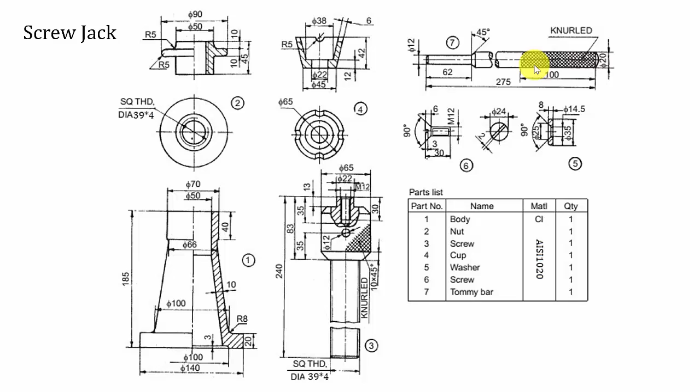In screw jack we have 7 parts, namely the body, the nut, the screw, the cup, the washer, the second screw and the tommy bar. First I am going to draw the parts individually, then I am going to assemble it. First we will start with the body.

Open Solidworks, click New and create a new part. First I am going to draw this section and I am going to revolve it so that I will get the whole body assembly.

Select the front plane, click Sketch, and draw the outline of the body.

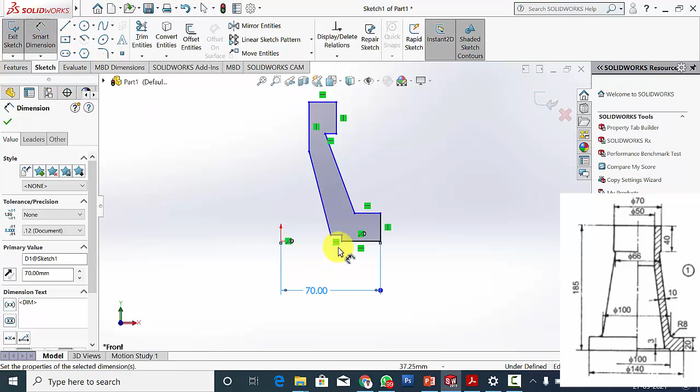Select Smart Dimension and mark all the dimensions. The outer diameter is 140 divided by 2. The inner diameter is 100 mm, so the radius is 50.

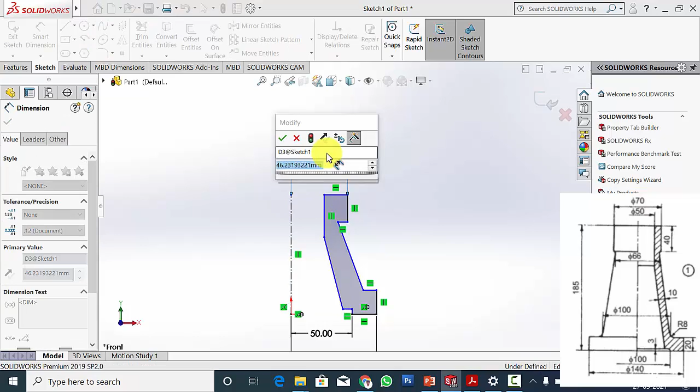On the top side, to draw the dimensions, I am going to draw a center line. The topmost diameter is 70 mm, so the radius is 35 mm. The inner radius is 25 mm, and the neck radius is 66 by 2, that is 33 mm.

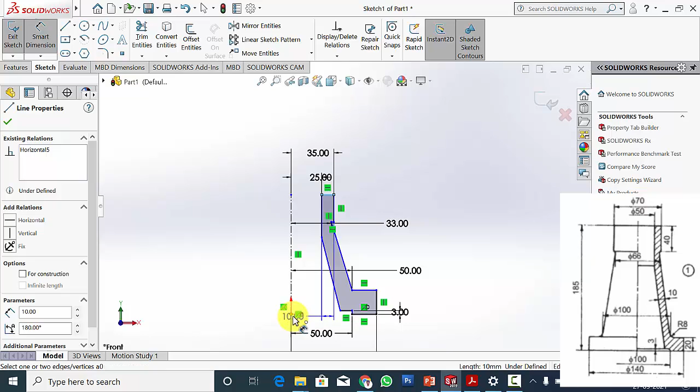This radius is 50 mm since the diameter is 100. The distance between these two lines is 3 mm. The overall height is 185 mm, and the height of this section is 40 mm. Then the height of the bottom section is 20 mm.

Now these two lines are parallel. So to make this parallel, click Control, select these two lines and select parallel. Then click OK.

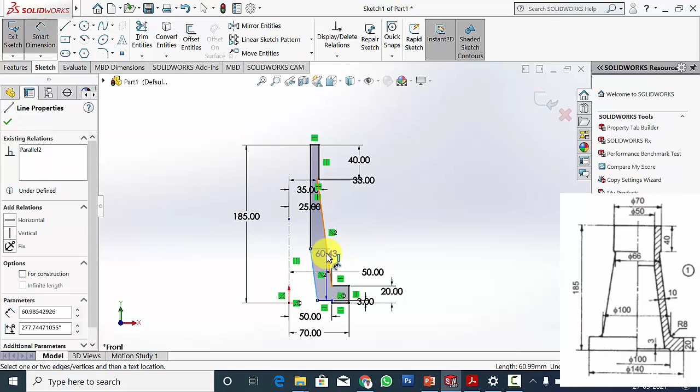Now the gap between these two parallel lines is 10 mm. Select the top point of the center line and any point of the top edge and make it horizontal, so the drawing is fully defined. There will be no minus symbol near the sketch.

Now go to Features, click Revolve Boss, click OK.

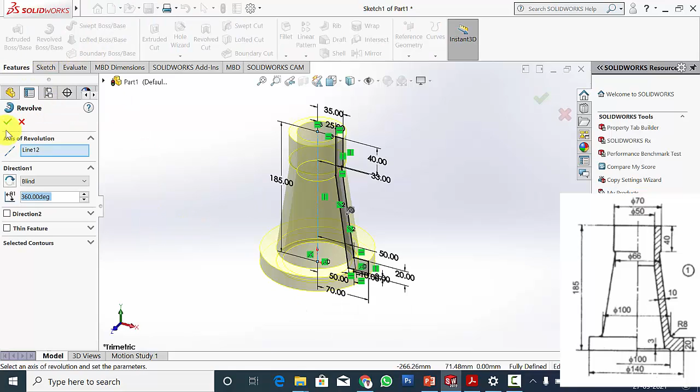Now to create the chamfer in this region, and to create the fillet in this region, go to Fillet, the radius is 8, select the section, then click OK.

Now the body is made of cast iron, so right click on the material, click Edit Material, go to Iron and click Gray Cast Iron, click Apply and Close.

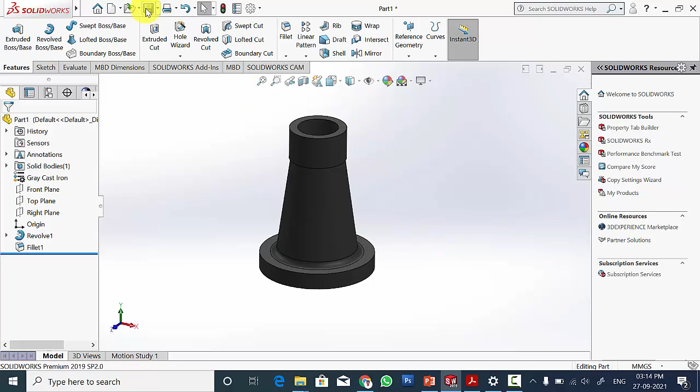Now save this part in a new folder. The name of the part is Body.

Close this. Next I am going to draw the nut. In the nut I am going to draw this section and I am going to revolve this.

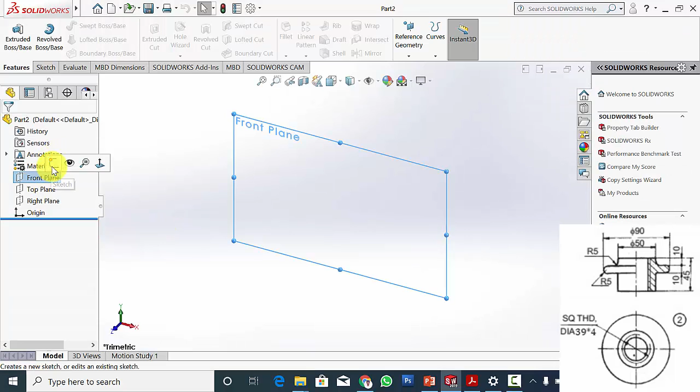Create a new part. Select the front plane, select Sketch, and draw the cut section of the nut.

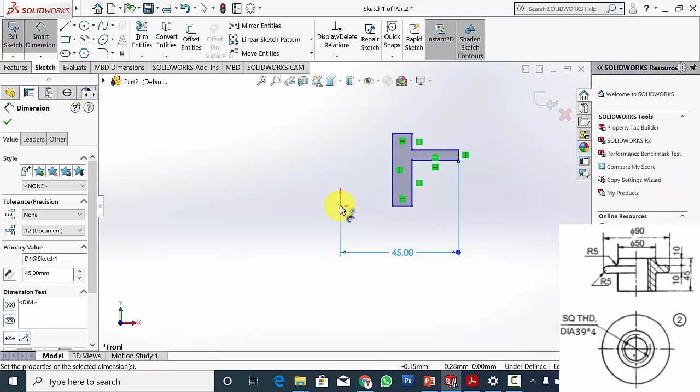Go to smart dimension and mark all the dimensions. The outermost diameter is 90 mm, so the radius is 45, and this radius is 25. The thickness of this section is 10 mm. The overall height is 45 mm, and this gap is 10 mm.

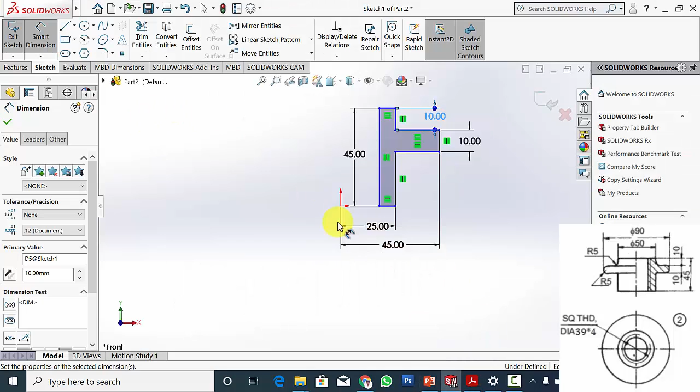Then the inner radius, the inner diameter is 39, so the inner radius is 39 divided by 2.

Now click this point, select any one of the points in the bottom line and make it horizontal. Further, these two lines are collinear, so click Ctrl and select these two lines and make it collinear. Now the drawing is fully defined.

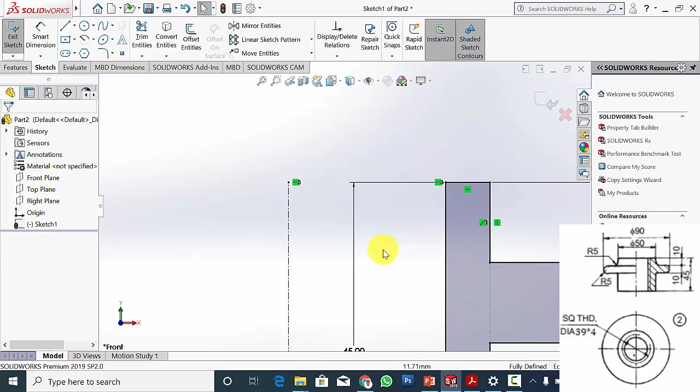So to revolve this, I am going to create a center line, and you can see a blue color dot here. To make this black, click Ctrl, select the point and any one of the points in the top edge and make it horizontal. Now the sketch is fully defined.

Go to Features, Revolve Boss, click OK. Now to create the fillet in this region, select Fillet. The fillet radius is given as 5 mm, as you can see in the image. So select the regions 1, 2 and 3. Now click OK.

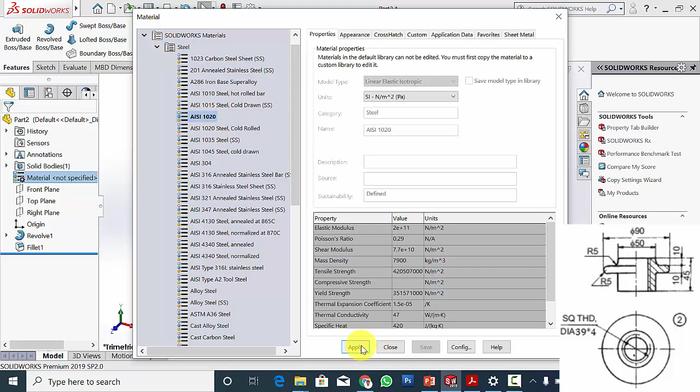This part is made of AISI 1020. Right click on the material, select Edit Material, go to Steel and select AISI 1020, click Apply and Close. Now save this part. The name is nut.

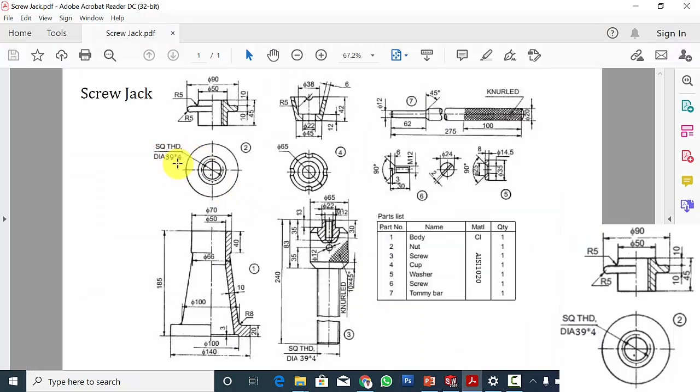Here we have to create an internal thread as specified in the drawing. It's a square thread of diameter 39 into 4, with pitch 4 mm.

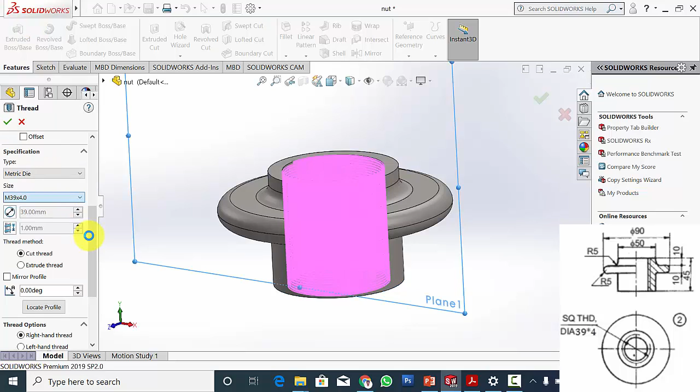Go to Thread, select the edge, and select the starting surface and the end surface. It is M39 into 4, so select M39 into 4, and trim the start face and trim with end face.

Since we are adding an internal thread, we have to cut the thread. Click OK. Now we have created the thread. Save the drawing.

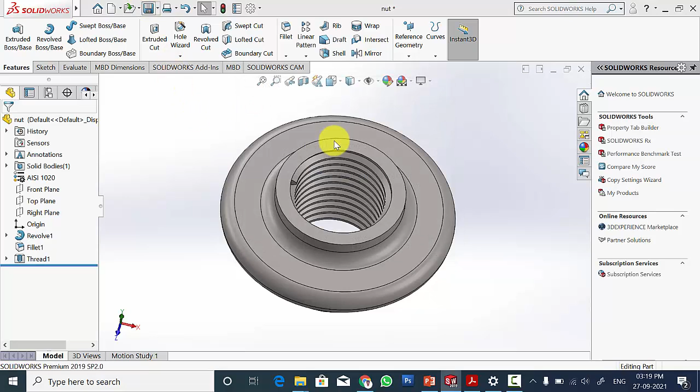Next I am going to draw the third part, that is the screw. Click New. Here also I am going to draw the right side section and revolve this.

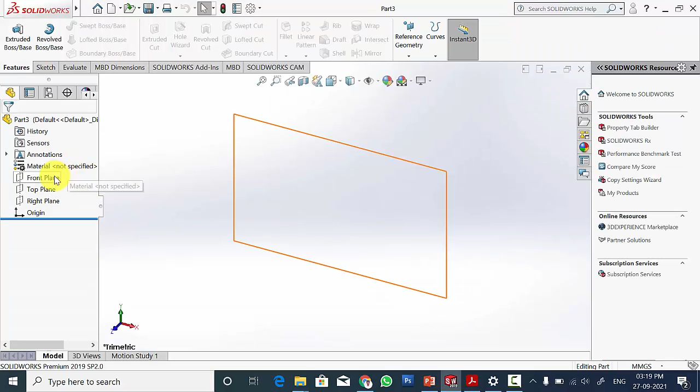Click Part, select the front plane and click Sketch. Select the line and draw the right side. Just draw the outline.

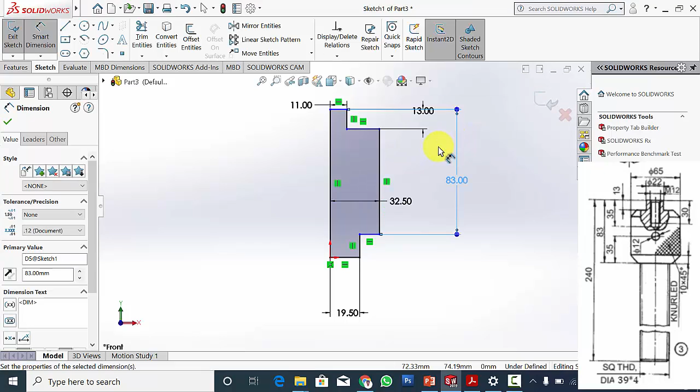Go to Smart Dimension and mark all the dimensions. So this diameter radius is 39 by 2. Then the overall radius is 65 by 2. Then the top radius is 22 by 2, that is 11 mm. And the height of this section is 13 mm. Then from the top, this edge is 83 mm. Then the overall height is 240 mm.

So now I have given all the dimensions. Go to features, click revolve boss and select the center line and click OK.

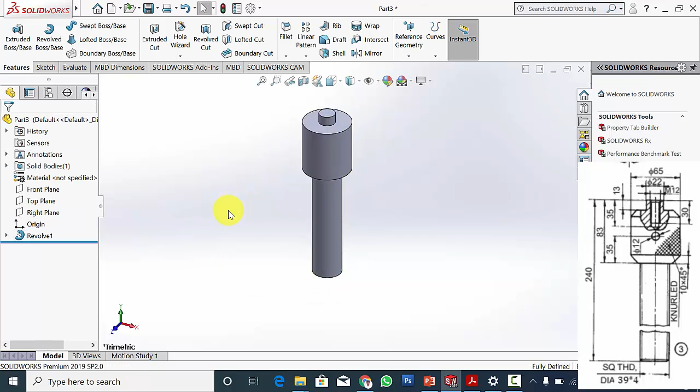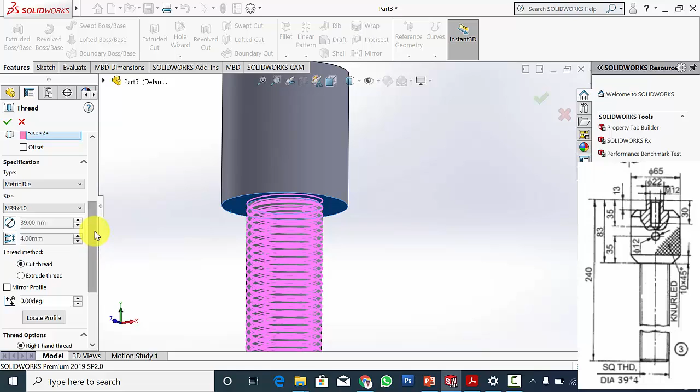Now I have to create the threads here. So go to thread, select the edge, select the starting and select the end face. Then the size is M39x4. So here you have to select the cut thread, trim with the start face and trim with the end face. So now we have created the thread.

So in the top we have to create a hole. So actually the hole is an advanced hole, it's a threaded hole. So go to hole wizard, and this is the given hole type. So select the hole type and the dimension is given as M12 here. So I have selected M12 and change it to blind. The height is 30 mm. So select the type as helicoil tap drill because it is a drilled hole.

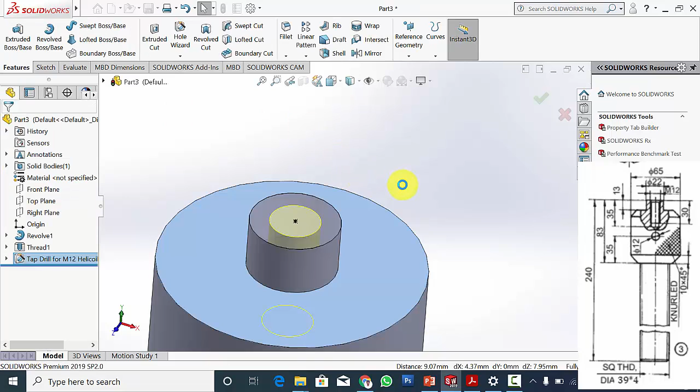So go to position, select 3D sketch, then select the surface, then click escape, click control, select the center point and the diameter and click concentric so that it will be located at the center point. Now click OK. So inside this hole you can see that it's a tapped hole.

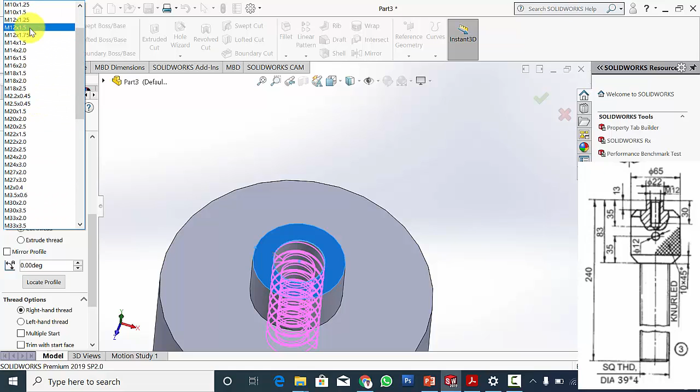So inside this hole we have to create the thread. So go to thread, select the start point, starting edge, then starting face and create thread up to 30 mm. So the thread size is M12, it is M12 into 1.5. Since we are creating internal thread, click extrude thread, then trim at the start and the end face. Click OK. So now we have created the thread at the top.

Next I am going to chamfer. So click chamfer and the chamfer distance is given as 10 into 45 degree, it is preset. Select the edges you want to chamfer. Then click OK.

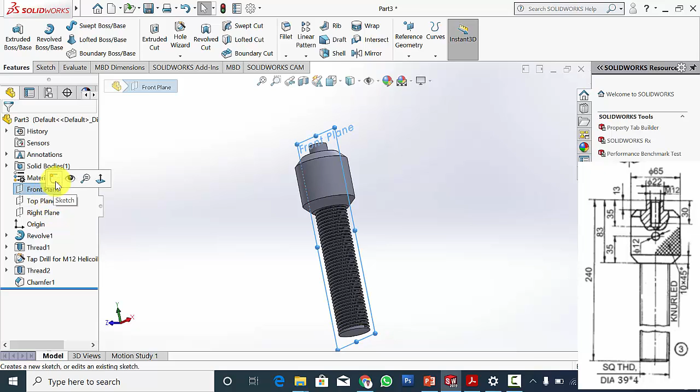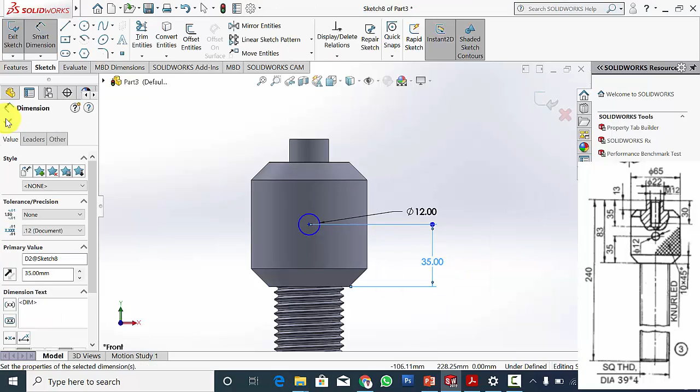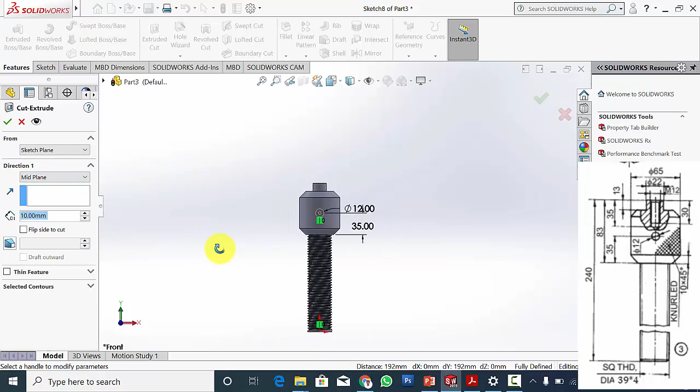Now there is a hole of diameter 12 mm here. So select any one of the vertical plane and draw a cylinder of diameter 12 mm. And from the bottom edge, the height is given as 35. So to make this fully constrained, click Control, select the origin and select the center point of the circle and click vertical. So now the circle is black in color. So go to features, select extrude cut and click midplane, click and drag the arrow and select OK. Now we have created the hole at the center.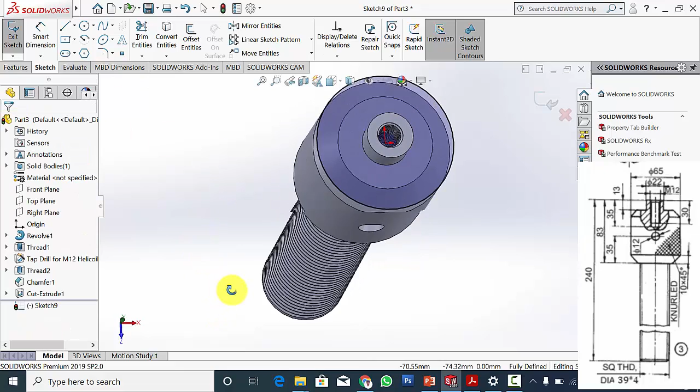Further we have to create the knurled surface, that is very important. So for that select this surface, click sketch, draw a circle, then click Control, select the circle and select the inner circle and click concentric to make the center as same and click co-radial so that the radius will be equal. So now I have created a circle. I'm going to convert this circle into a helix.

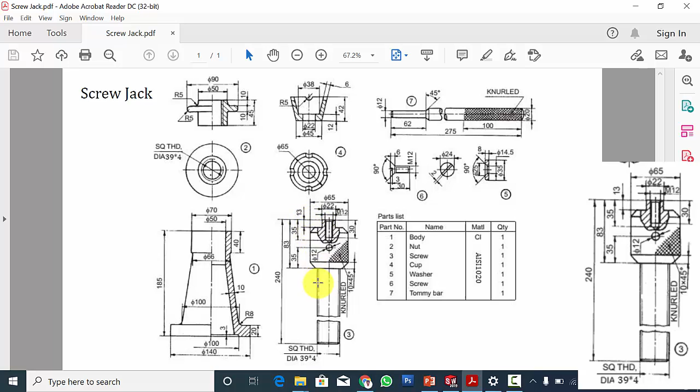So go to curves, select helix and spiral. So change the direction, click the arrow and move it. The pitch height is 70 mm because in the image you can see that the overall height is 83 and this section height is 13 mm. So the remaining height will be 70 mm. So the pitch is 70 mm and the number of revolutions is 1. Click OK. So now I have created the helix.

Further select the surface, click sketch and draw a center rectangle. Then mark the dimensions. So roughly I am going to select 1:1. Now click the center point of the rectangle, click Control and select the helix and click Pierce. Then click OK.

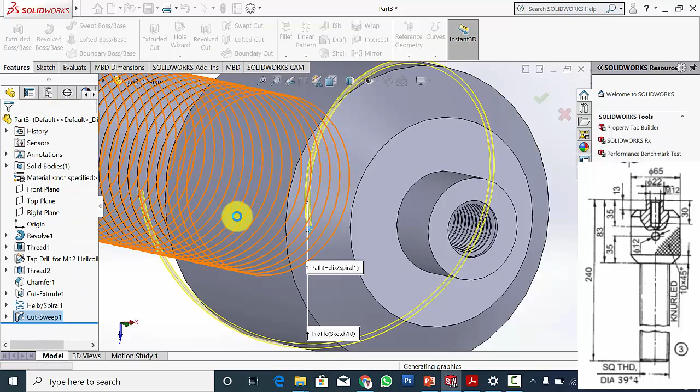Now exit the sketch, go to Features, click Swept Cut. So this is the rectangle what I have drawn and the path is the helix. Then click OK. So now I have created a single cut. Now you can click the helix and you can hide this. Here you can see a single cut. Now I am going to pattern this. Go to circular pattern.

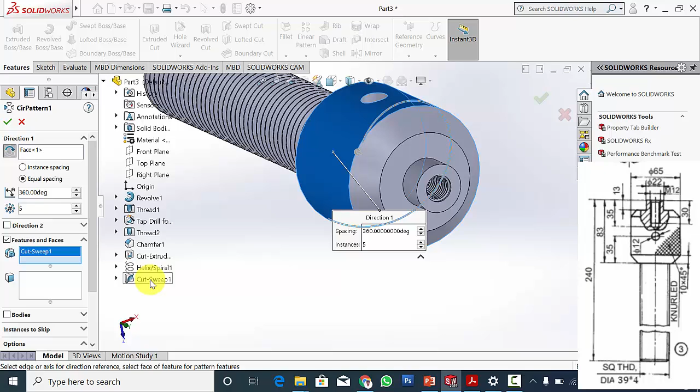Select the cylindrical surface and features to pattern. Select the tree and select the cut sweep. I am going to pattern it 10 times. Then click OK. So now we have created it in one direction.

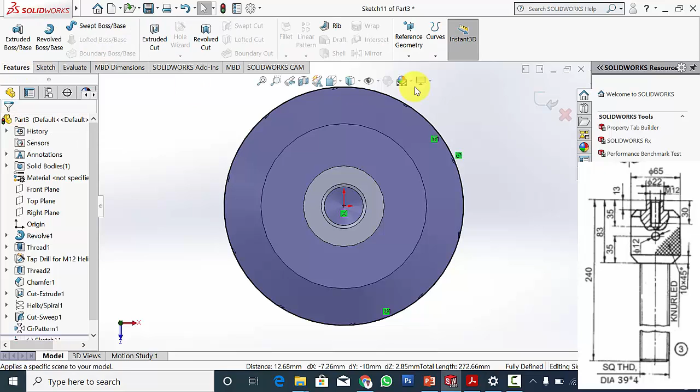Now I am going to create it in the other direction. So again select the sketch, select the top plane, draw a circle, click Control and select the two circles, click concentric and co-radial, click OK, then go to Features, Curves and convert it as a helix or spiral. The data is already set, so you can simply click OK.

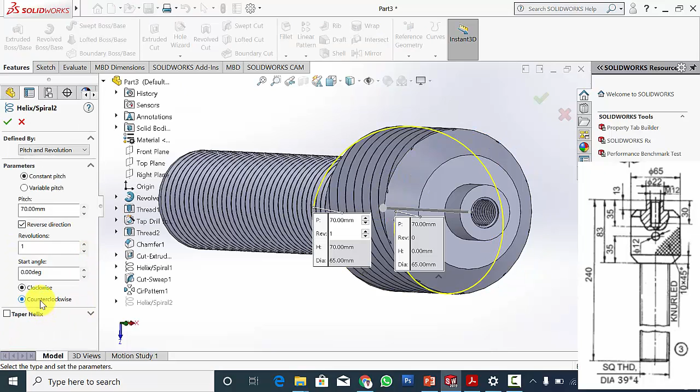So you can see, here we actually have to create the helix in the opposite direction. So edit the feature and select counterclockwise, because previously we had selected clockwise. Now I have drawn the helix.

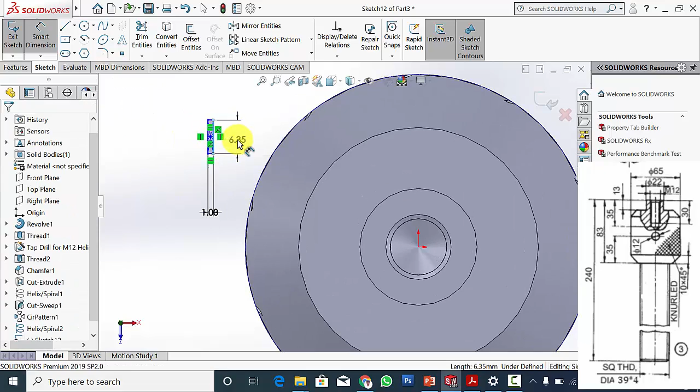Further, click the top surface, click sketch and draw a center rectangle. Follow the same procedure, of size 1:1. Now click Control, select the center point of the rectangle and the helix, and click Pierce.

Now exit the sketch, go to Features, click Swept Cut and select the path as the helix. Then click OK. Now in the counterclockwise direction, I have created a single cut.

You can see that. Now I am going to pattern this. Select circular pattern, select the direction as the cylindrical surface and the feature as the final cut swept. I am going to use 10 patterns, then click OK.

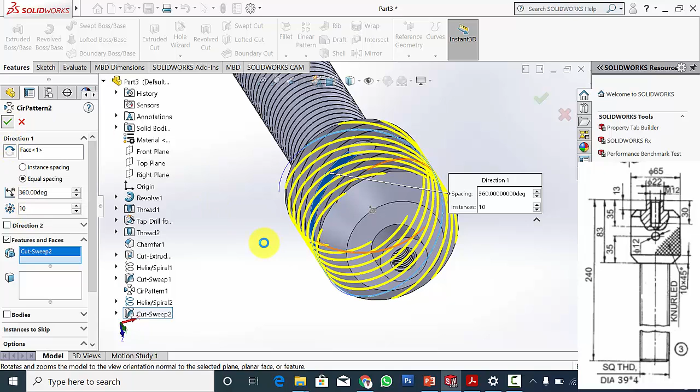Now you can hide the helix. So we have created the knurling. Now this part is made of AISI 1020.

So right click on the material, edit the material and select the material as AISI 1020. Click apply and close this. So save this. The name is screw.

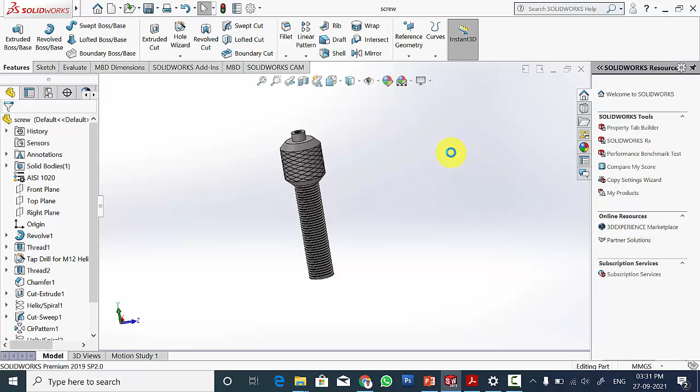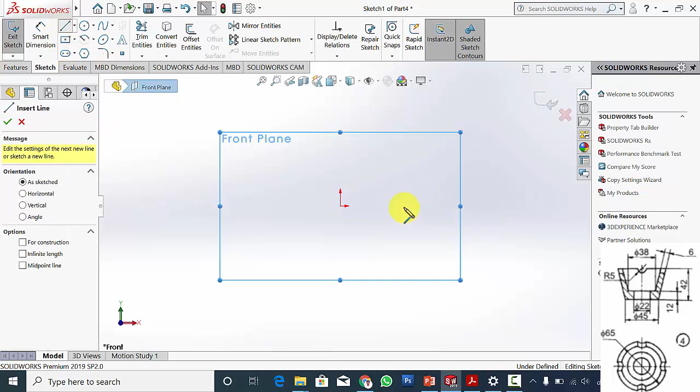Now close the part. Next I am going to draw the cup. So in the cup also I am going to draw the half side and I am going to revolve this. Go to new, select a part, select the front plane, click sketch and draw the outline of the cup.

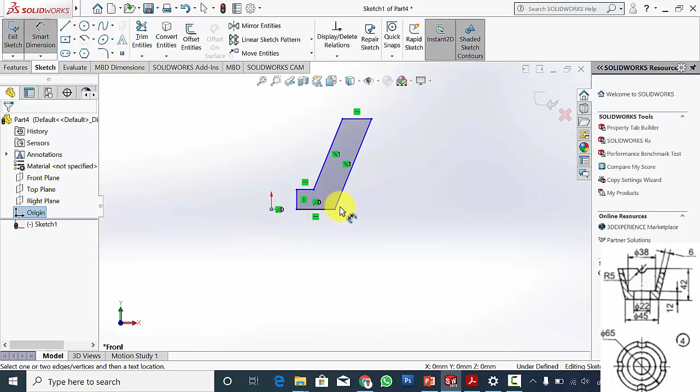Go to smart dimension and mark all the dimensions. This radius is 45 by 2, and the inner radius is 11 as the diameter is 22, and the height is 42. Then this height is 12 mm.

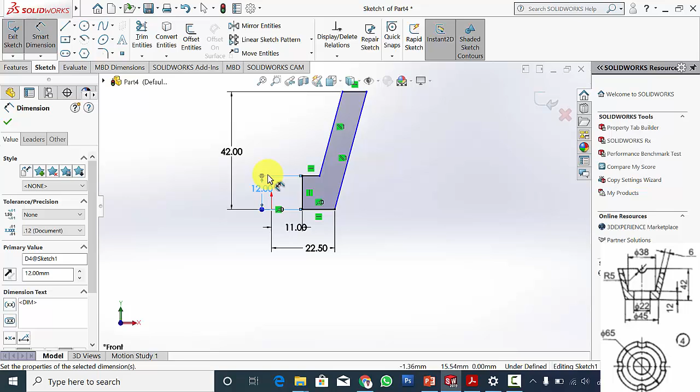Now this radius is 38 by 2. These two lines are already in parallel. If these two lines are not in parallel, then click Control, select these two lines and select parallel. Now it is already in parallel condition, so I am going to click Escape.

Then the gap between these two lines is 6 mm. Now the drawing is fully constrained. To revolve this, I am going to create a center line and I am going to click the topmost point and make it horizontal. Now select Features, click Revolve Boss, then click OK.

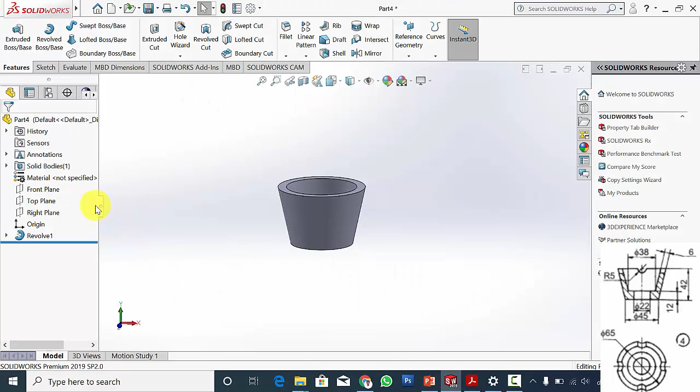So here I am going to create a cut of radius 5 mm. Select any one of the vertical planes, click Sketch, draw a circle of radius 5 mm and the diameter is 10 mm. Here I have drawn the circle exactly at the center point.

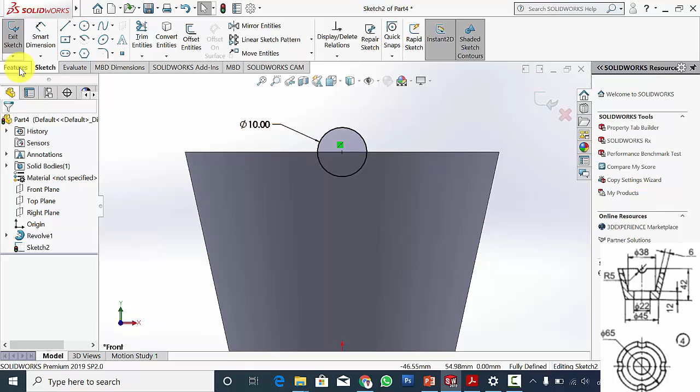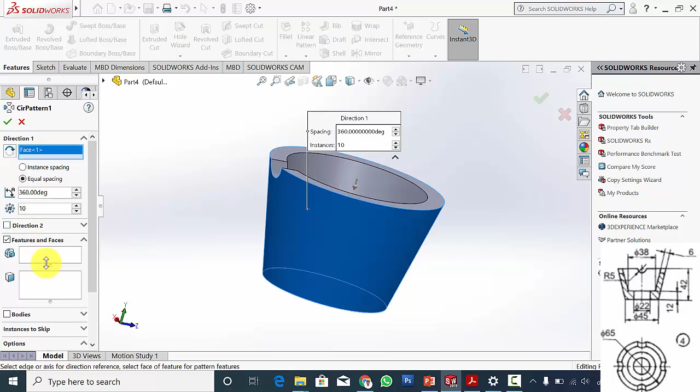Then go to Features, select Extrude Cut, extend this and click OK. Similarly, I have to create a cut in all 4 directions. So I am going to pattern this, select circular pattern, select the direction as the cylindrical surface and the feature is the cut extrude, and I am going to pattern it 4 times. Then click OK.

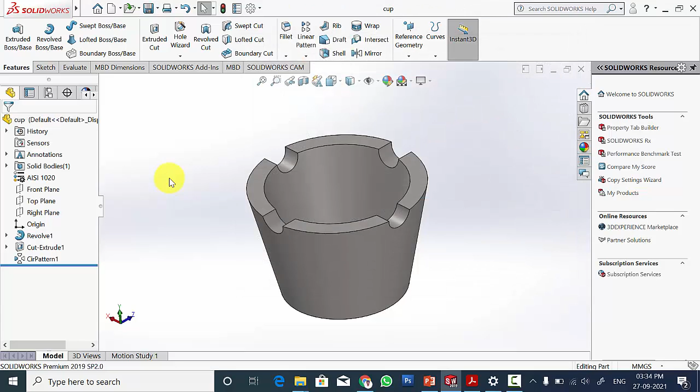Now this is made of AISI 1020. So edit the material and go to AISI 1020. Save it. The name is cup. Close this. Next I am going to draw part number 5, that is the washer.

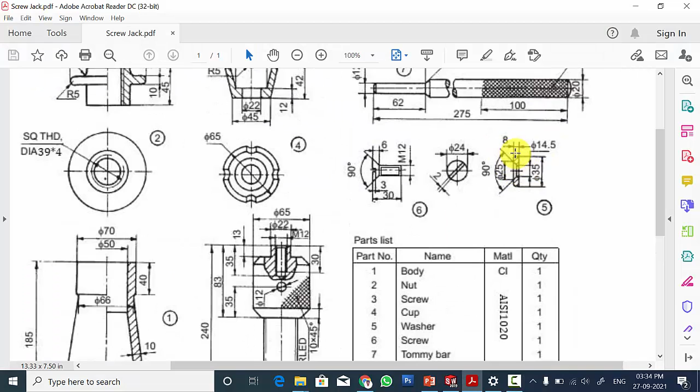So click new part. In the washer also I am going to draw one part and revolve this. Select the front plane, click sketch and draw the outline of the washer. Click smart dimension and mark all the dimensions.

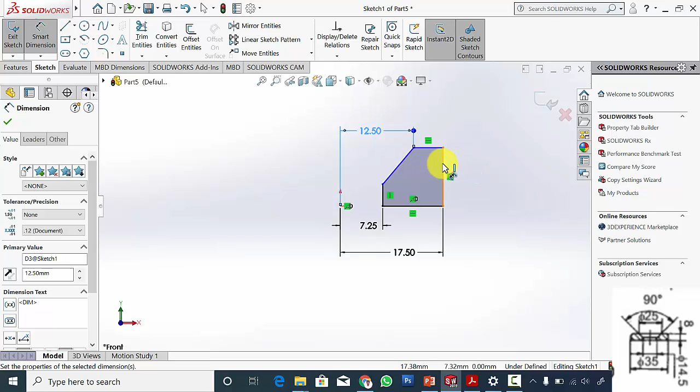So the outer radius is 35 by 2. The inner radius is 14.5 by 2. Then this radius is 25 by 2. Then the height is 8 mm.

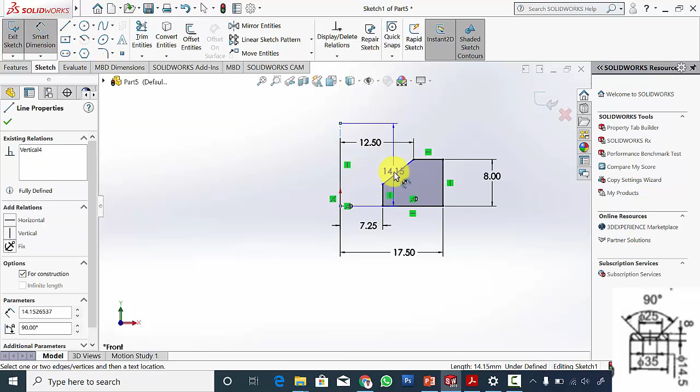To draw the inclination I am going to draw a center line. Now click smart dimension and select these 2 lines and you can draw the inclination. So actually the overall inclination is 90 degrees. So for one side it is 45 degrees.

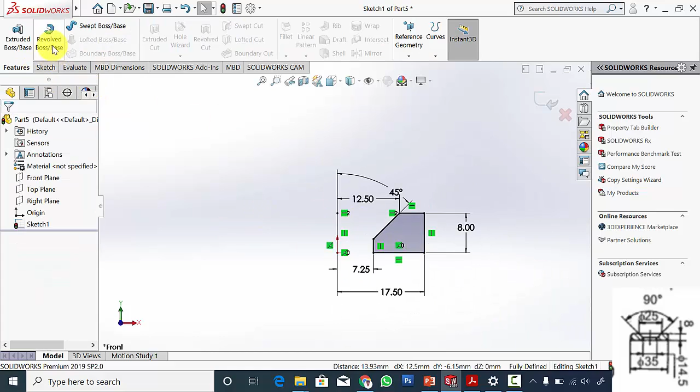So to make this blue as black, click Control, select the point and select any one of the points on the part and click horizontal. Now it is fully defined. Go to Features, select Revolved Boss, click OK.

So the washer is also made of AISI 1020. So edit the material and change it to AISI 1020. Save this. The name is washer.

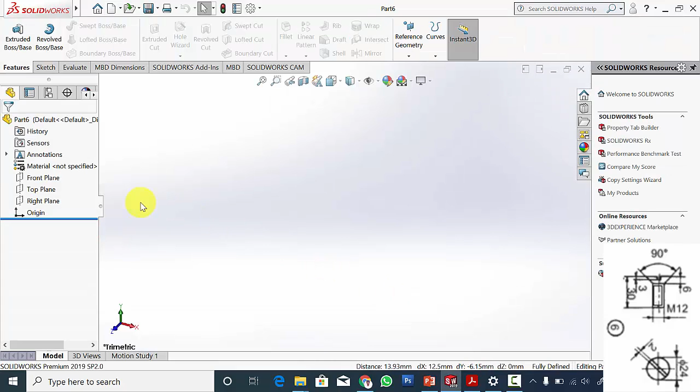Next I am going to draw the sixth part, that is the small screw. So create a new part. Select the front plane. I'm going to draw the right side of the screw and I'm going to revolve this.

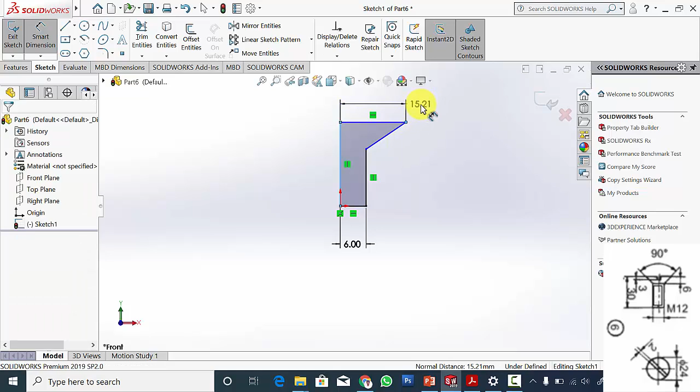Click this line and make it vertical. Click Smart Dimension and set the radius of the bolt as 6 mm. Since the diameter is 12, and the top radius is 12 mm since the diameter is 24, then this height is 6 mm and this inclination is 45 degrees.

It is already specified, so click cancel. Then the overall height is 30 mm. Click OK, go to Feature, click Revolve Boss, click the center line, then click OK.

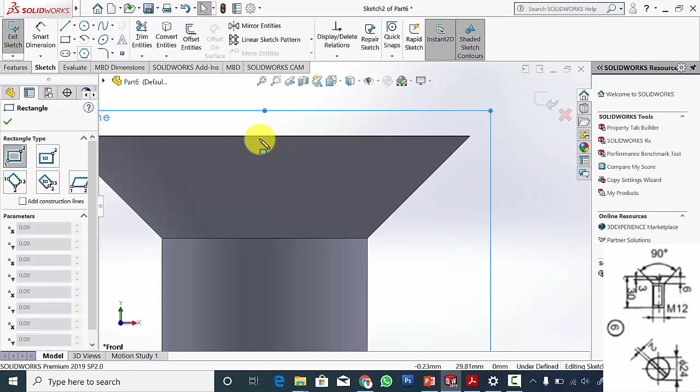Now we have to create a slot at the top. The slot width is 2 mm and the height is 3 mm. Select any one of the vertical planes, click Sketch, and draw a corner rectangle by touching the top face. The width is 2 mm and the height is 3 mm.

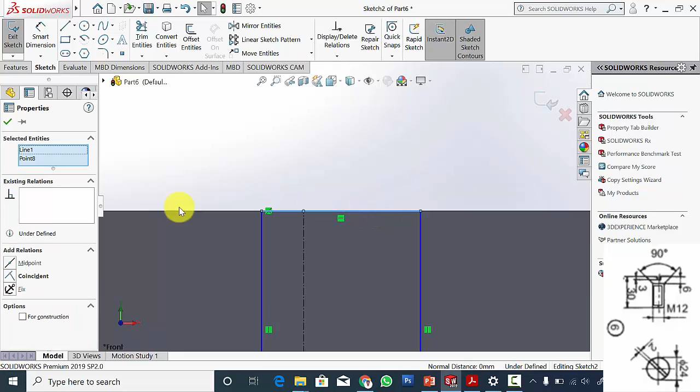To make it centered, I am going to create a center line, starting from the center and touching the topmost edge. Now click the center of the center line and the edge of the rectangle and select midpoint. Then click OK. Now it is fully defined.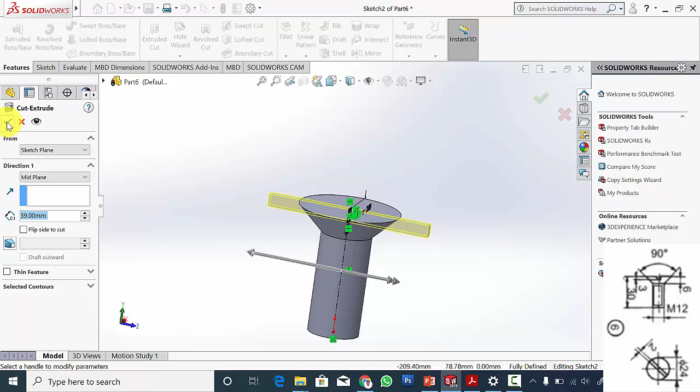Go to Features, click Extrude Cut, select midplane, click and drag the arrow to increase the dimension. Click OK. Now we have created the slot.

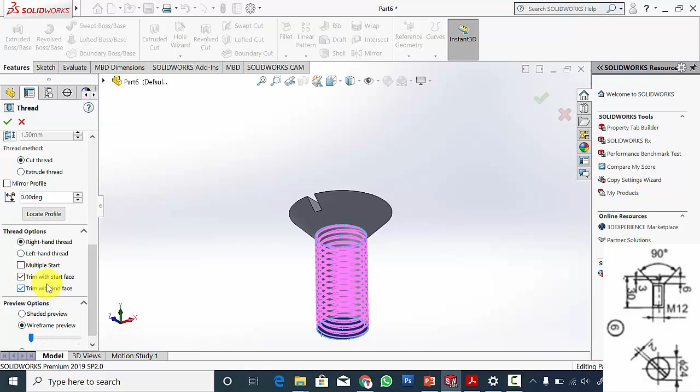Next we have to create the thread. The thread size is given as M12. Go to Thread, select the edge, select the starting face. Now change it to up to selection and select the end face. The thread size is M12 into 1.5. Select cut thread as it is an external thread, then trim the surfaces and click OK. Now we have created the thread.

This part is also made of AISI 1020. Change the material. Now save this. This is screw 2.

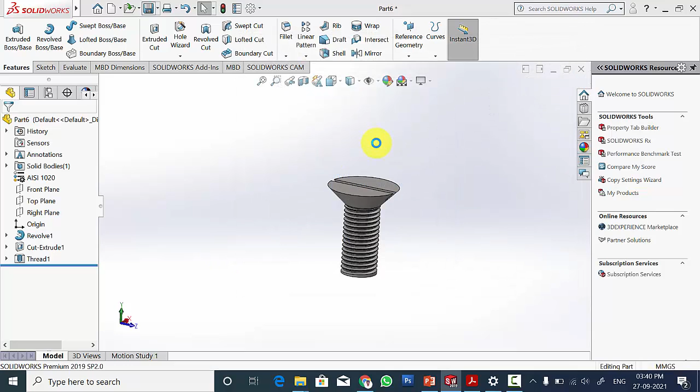Finally, I am going to draw the Tommy bar. Here also I am going to draw the top side and revolve this. Select a new part, click front plane, draw the top side of the Tommy bar.

Mark the dimensions. The radius is 6 mm, the outer radius is 10 mm. The inclination is actually 45, but from the vertical it is 45 plus 90, which is 135 degrees. Then the overall length is 275 mm, and this length is 62 mm.

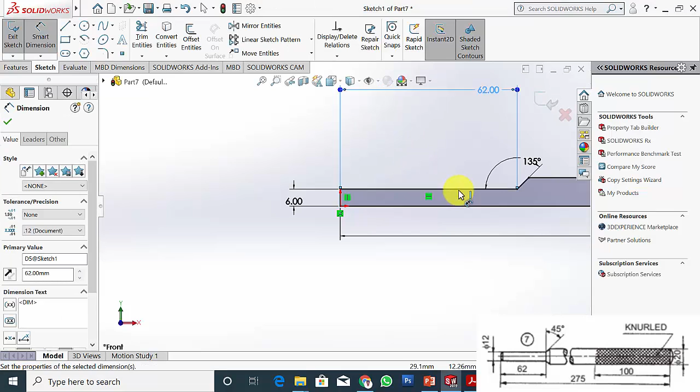Click OK. Go to Features, click Revolve Boss, select the center line, click OK.

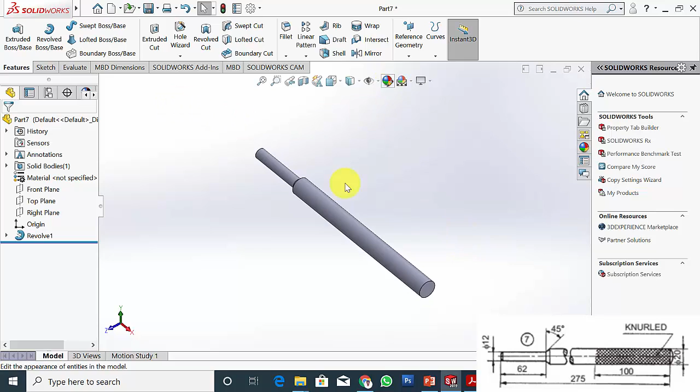Now I am going to create the knurling on this surface. Follow the same procedure: select the surface, click Sketch, and draw a circle. Click these two circles and make them co-radial and concentric. Now go to Feature and convert this into a helix.

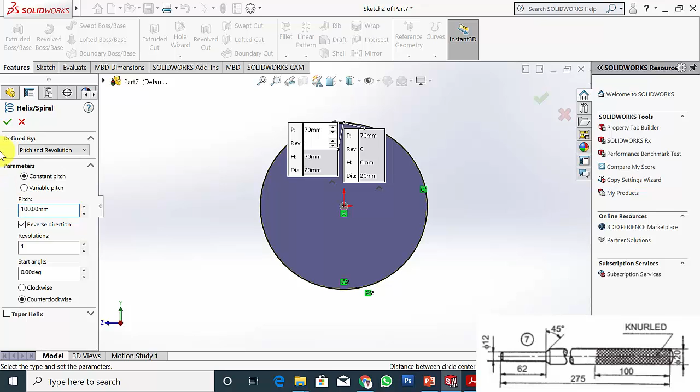The height is 100 mm as mentioned, so set it to 100 mm. Click OK.

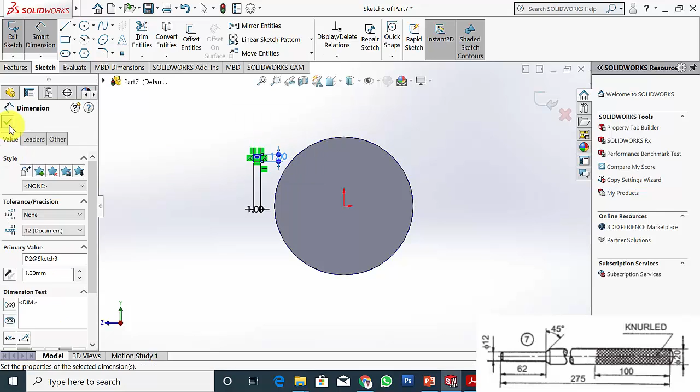Now again select this surface, click Sketch, draw a center rectangle of size 1 mm into 1 mm. Now click Ctrl, select the center point of the rectangle and the helix, and make it pierce.

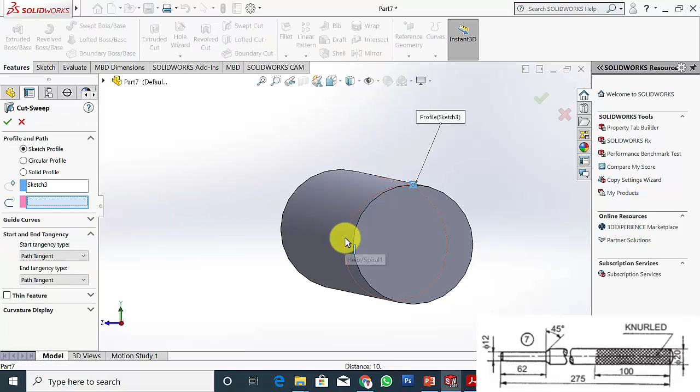Now go to Features, exit from the drawing, click Swept Cut and select the path as the helix. Click OK. So now I have created one cut.

I am going to pattern this. Go to Circular Pattern, select the cylindrical surface as the face. The sweep is already selected and the number of patterns is 10. So I have created it in the clockwise direction.

Next I am going to create the knurling in the counterclockwise direction. Follow the same procedure: draw a circle, click Ctrl and select the two circles.

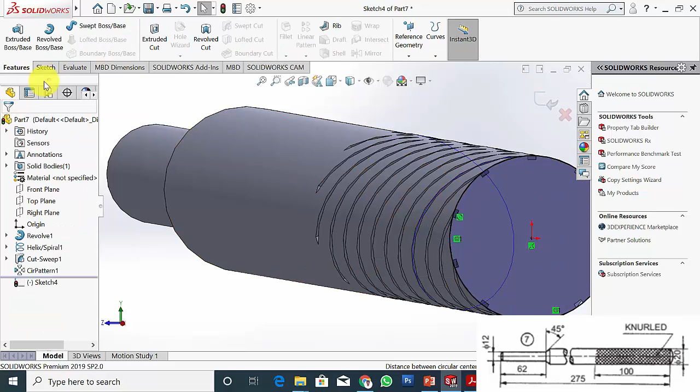If you can't select the circle, you can rotate it. Make it concentric and co-radial. Now go to Features and convert the circle into a helix. Select counterclockwise direction, since previously we selected clockwise direction.

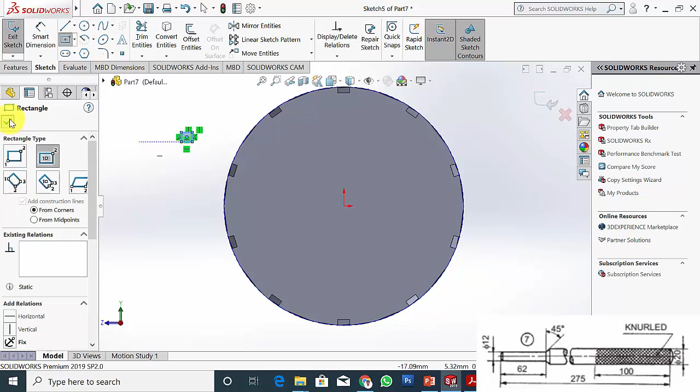Click OK. Now again select the surface, click Sketch, and draw a center rectangle of dimension 1 mm into 1 mm. Now click Ctrl, select the center point of the rectangle and the helix, and make it pierce.

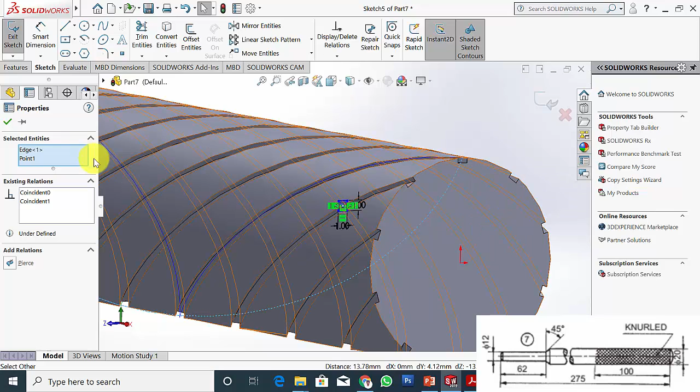Now go to Features, exit the sketch, click Swept Cut and select the helix, then click OK. Now I have created one cut in the opposite direction.

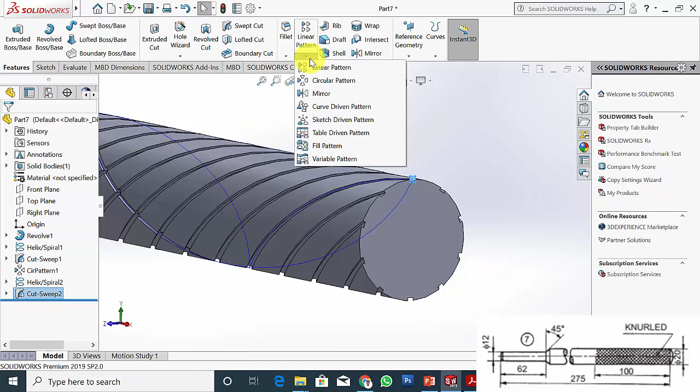Now I am going to pattern this. Go to Circular Pattern, select the direction as the cylindrical surface. Here I have already selected 10. So click OK.

Now I have drawn the Tommy bar. Change the material to AISI 1020. In this video I have drawn all the parts of the screw jack. In the next video I am going to show you how to assemble it. Thank you.